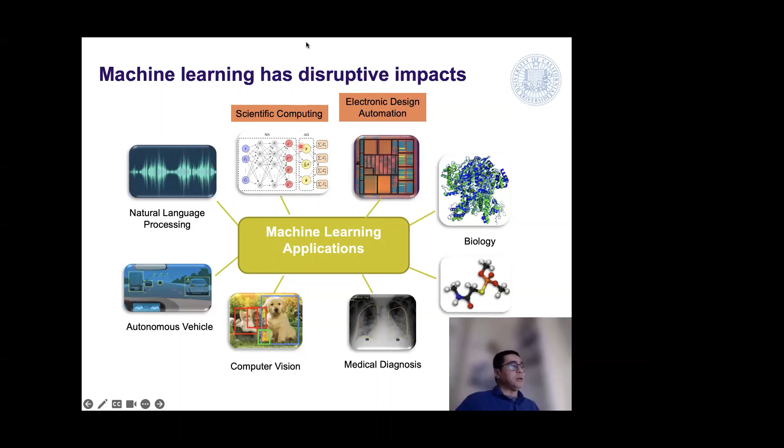As a result, many thermal power regulation techniques have been introduced in the past, such as clock gating, power gating, dynamic voltage and frequency scaling, and task migrations. But one critical foundation for all these regulation algorithms is to correctly estimate the chip temperature so that they can make the right decisions.

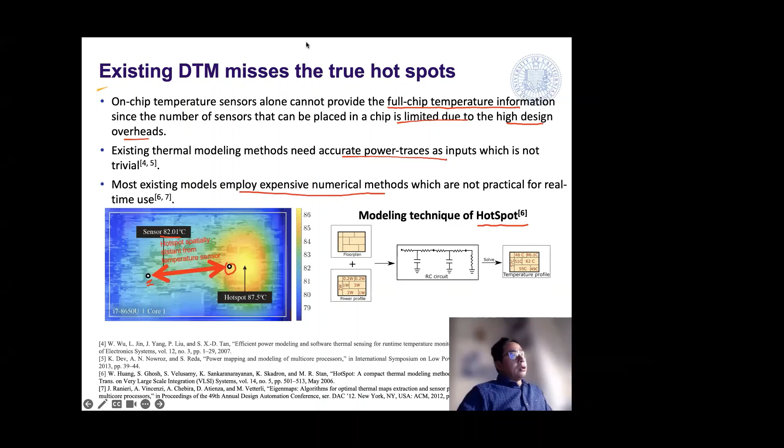But as we know, this is typically for design time - they are not very efficient for on-chip real-time estimations. Although there are many existing numerical approaches, all of them are quite expensive, not practical for real-time estimation.

The first focuses on thermal hotspot and full chip thermal map estimation using machine learning based approaches. The second is full chip power density estimation, also for commercial multi-core chips. The third, we focus on using convolutional graph neural networks for fast thermal analysis for chiplet based designs.

And then I'm going to introduce the thermal IR camera setup system used in my lab to facilitate some of the research work here. Then I'm going to cover the following specific topics.

First, I'm going to show you how to do hotspot heat source identification. And then I will talk about how we do full chip thermal map estimation based on what we call a high-level utilization metrics using machine learning based approaches.

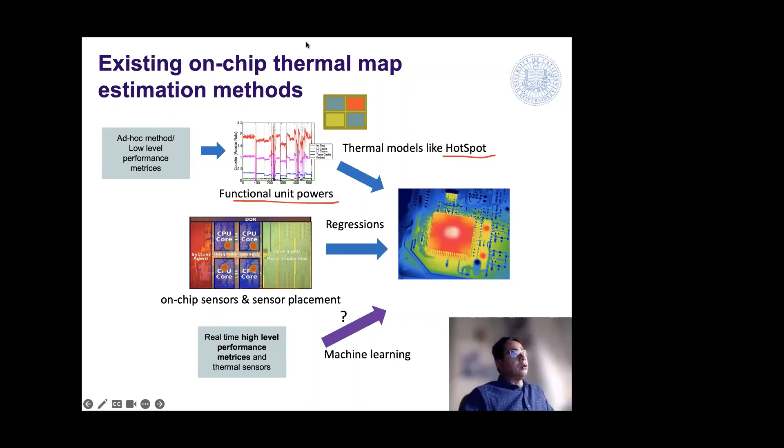So it turns out there has been a number of research efforts performed in the past to do full chip thermal estimation. We can classify existing methods into several categories. The first category is called a bottom-up approach - basically, as the name suggests, they try to build a thermal model from existing numerical approaches, for example finite difference. This is actually represented by HotSpot-based approaches. Then there's also a lot of research to develop so-called equivalent thermal RC networks.

This kind of approach typically requires more expensive computation because the network tends to be very large for very accurate thermal analysis.

The second one is what we call top-down based behavior thermal models. My lab actually developed several of this approach. Basically, we try to build some system models using pole-zero methods to capture the thermal response using the matrix pencil subspace identification method.

Regarding power estimation, there's also a number of approaches developed to estimate the function unit power based on some low-level performance counts. For example, this paper from our lab. Then there's some other approach that's more ad hoc. So in general, estimating the function unit power is not trivial.

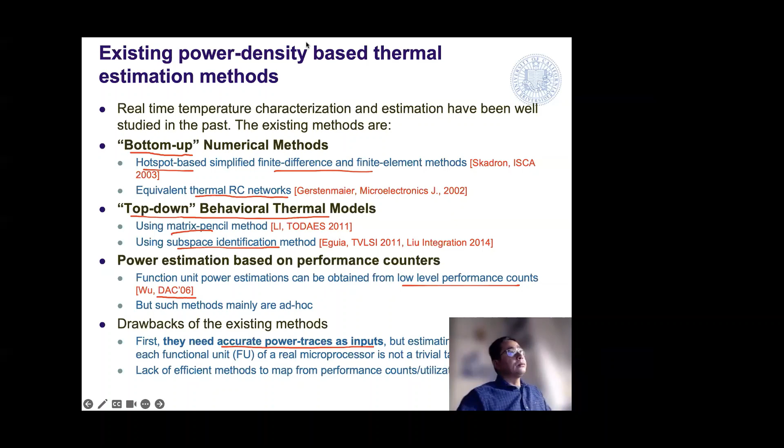One of the key differences between our approach and the existing approach is that instead of using the function unit power, we use high-level performance metrics.

And also we can access them in real-time fashion, so it's very fast.

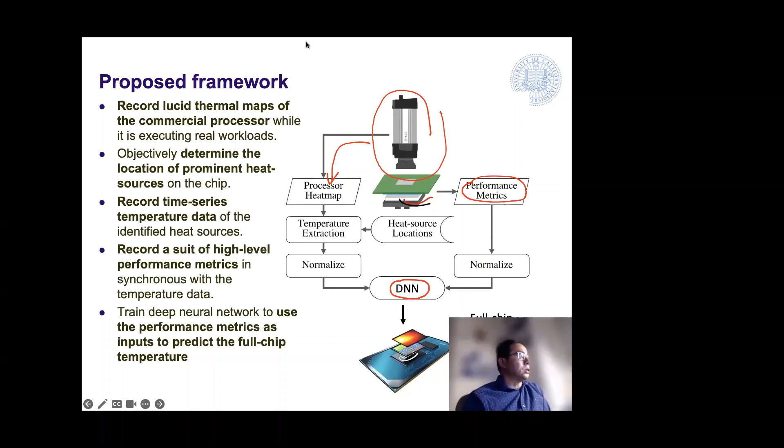Using this thermal camera, we can record two kinds of data. One is the thermal map information, you know, from here. And then at the same time, we can synchronously record all the performance metrics like IPCM, as I mentioned. Once we get all this data, we can use machine learning to train the data using the performance metrics as the input, and the measured data from the thermal cameras as the output, to train the networks. So basically, this is the flow of the proposed method.

To measure the on-chip temperature information, the thermal map, turns out to be a challenging problem. The reason is that to really measure the temperature map, we have to remove the heat sink. Typically, if you remove the heat sink, the chip can burn out very quickly.

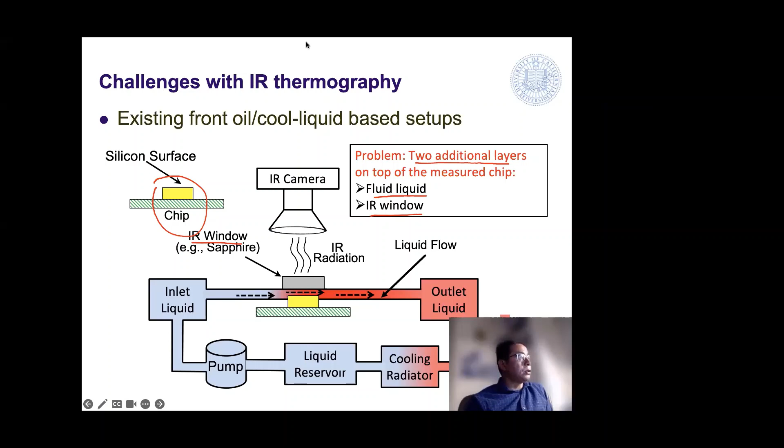So in this work, we use a totally different thermal imaging system. Instead of cooling the chip on the surface, we actually cool the chip from the back.

So the first question we have is that instead of finding the temperature hotspot, actually we find the so-called heat source, the power density hotspot. So why a power density hotspot? The reason is that the heat source hotspot actually is a potential temperature hotspot. Because in our work, we need to try to find all the potential temperature hotspots. As a result, it is better to find the power density hotspot. We're going to explain this more later.

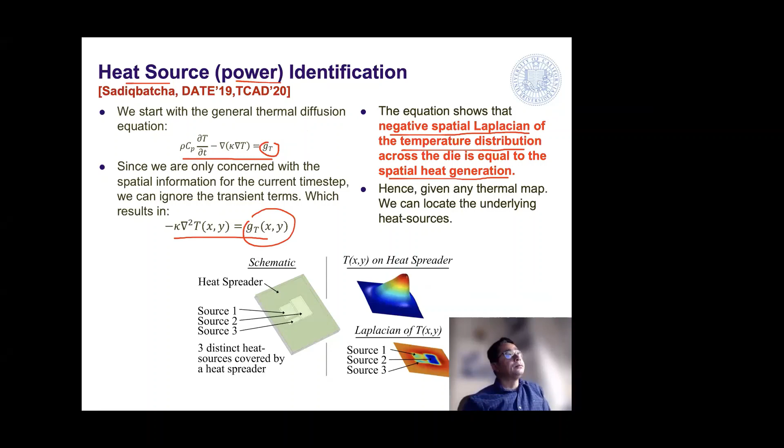So this figure gives you some visualization of how the heat source hotspot is computed. Let's say we start with this temperature map on the left-hand side. You can see the hotspot is pretty smooth in these regions. And then after the 2D Laplacian transformation, we get these figures right here. You can see we have a lot of heat source hotspots. But this just depends on the specific workload. To find all the potential heat source hotspots, we have to run many benchmarks, maybe thousands of them, to get a complete list of the heat source hotspots.

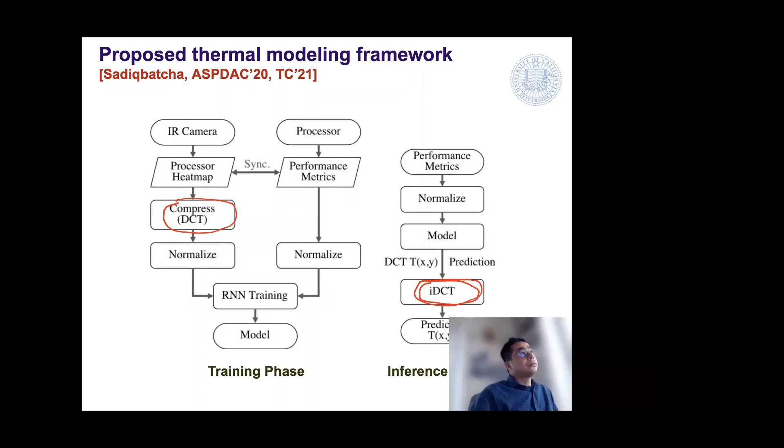So the next question we need to answer is how many coefficients we need for the image compression. We did some studies. We used 140,000 heatmap images for training, and computed the root mean square error of the image compression versus the number of DCT coefficients.

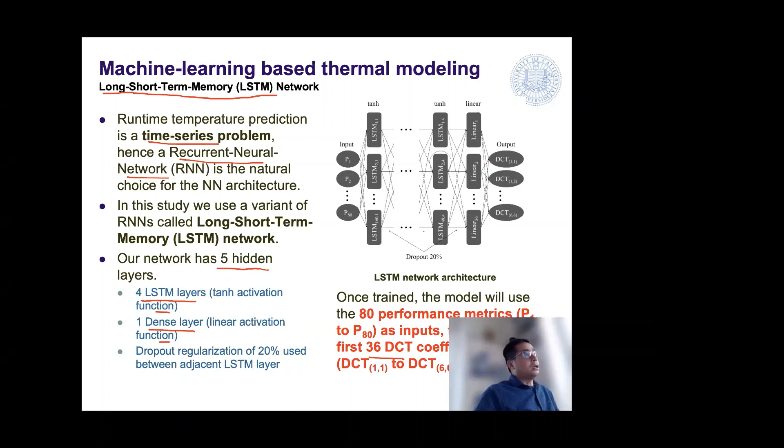For the LSTM, we basically have 100 epochs for training with 60 time steps. For all the data, 64% is used for training, 16% for validation, and the remaining 20% for testing. We make sure that the testing data doesn't have any overlap with the training data, so that we can really estimate the errors.

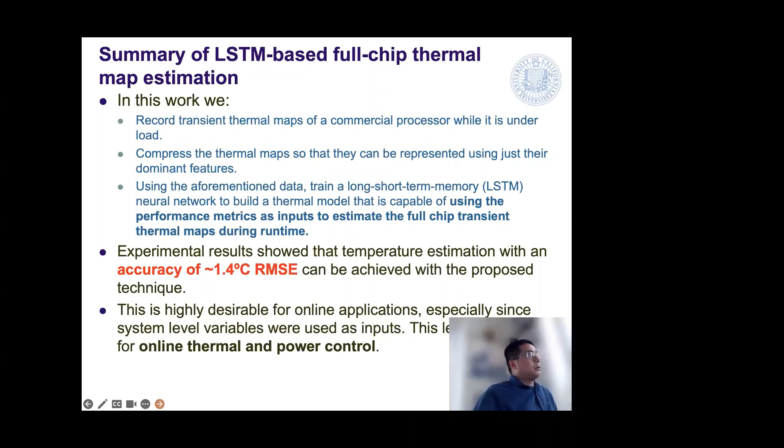This slide just summarizes what we did for the full-chip thermal map estimation. First, as we know, we have this thermal IR camera setup. As we know, generative neural nets have become very popular for image generation. Among all these generative networks, the generative adversarial network, also called GAN, is the most popular one.

The GAN model basically consists of two components. The first one is called the generator, and the second one is called the discriminator. The generator and the discriminator compete with each other. The generator generates a so-called fake image, which is fed into the discriminator, and the real image is also fed into the discriminator. The discriminator tries to distinguish between the real image and the fake image. It outputs real or fake.

The output constructs the loss functions, which feed back to the generator and the discriminator during training to improve both networks. So basically, after training, we hope the discriminator cannot distinguish the fake image versus the real image, so that the net result is that the generator will generate a very realistic image, which is like the real image.

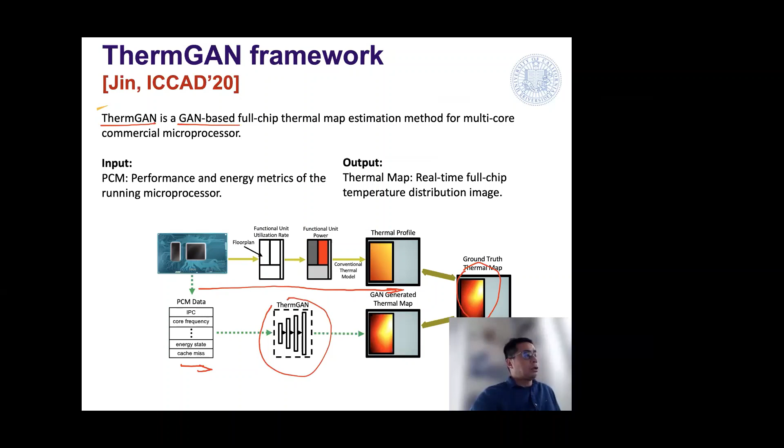This slide basically gives us more detail. Here's the ThermGAN architecture. ThermGAN is a GAN model. Basically, it consists of generators. The input of the generator is the PCM data, which is fed into the generator. It first forms the fully connected layers, and then it upsamples to generate the fake image. Then either the real image or the fake image will feed into the discriminator. The discriminator actually is a normal convolutional neural network.

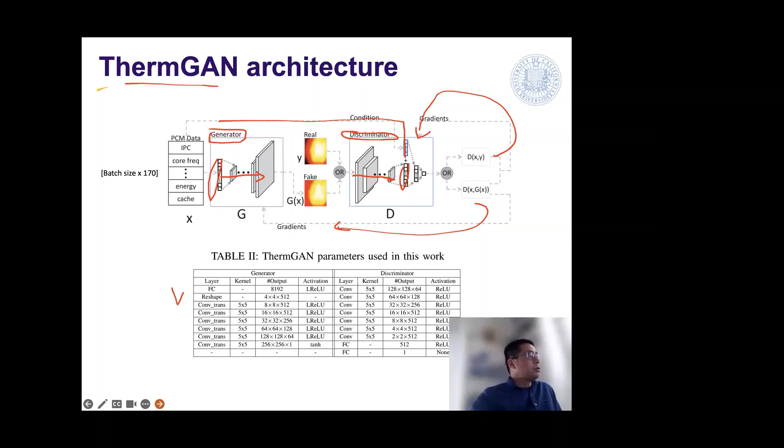It will first take the image, and then it will downsample into the latent features and create the fully connected layers, and then the PCM data is also concatenated with these fully connected layers here, eventually to form the two fully connected layers. The output will be just one value indicating if the image is real or fake. Also, the loss function will be formed to train both the generators through this feedback loop, and then the discriminators. Here are just some hyperparameters used for our ThermGAN models.

So this graph gives a further illustration of both the generator and the discriminator used for our ThermGAN modeling. So basically, the PCM data will form a fully connected layer, which includes 170 cells, and then it will generate another fully connected layer. This fully connected layer will be reshaped into the tensors. Through this upsampling process, we're going to create the thermal maps. This actually is a fake image.

Then the discriminator basically takes as input a thermal image, which can be a real thermal map or the fake thermal image, and then it will downsample to generate the latent features and form the fully connected layers, which are concatenated with the PCM data to form another two fully connected layers. So this discriminator will eventually judge if the input is fake or real.

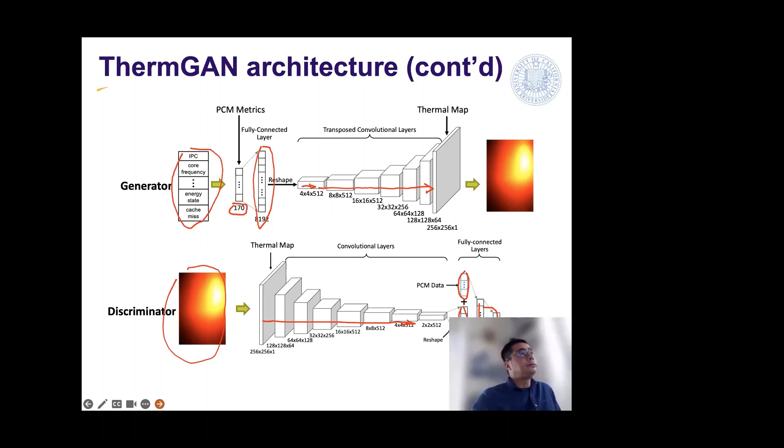Regarding the time, we found that the average cost for the inference is about 7 milliseconds. That translates to about 140 thermal maps per second. That's actually sufficient for online thermal and power regulation.

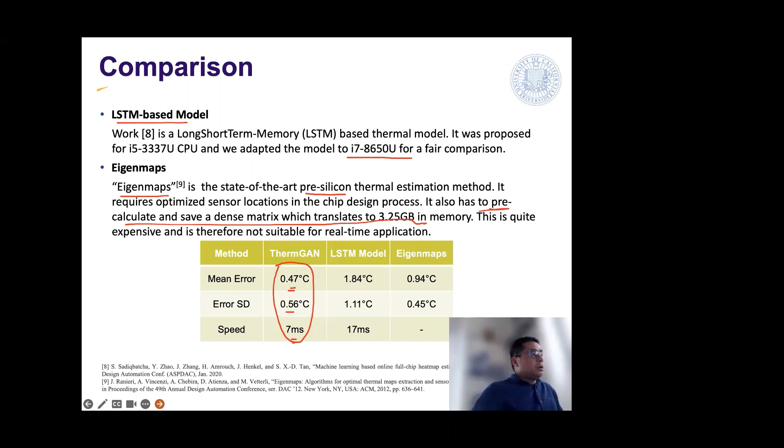As a result, these methods are actually not a real apple-to-apple comparison, but we just compare the accuracy between these three methods. This table shows that in terms of accuracy, ThermGAN beats both methods in terms of mean error and standard deviation. Also, in terms of inference speed, the ThermGAN model is faster than the LSTM method.

So this graph further shows the real-time capability of ThermGAN. We run ThermGAN on a brand new workload, which it has never seen. Basically, we run ThermGAN on the CPU for 2 minutes and then collect 7,200 samples. We found that ThermGAN actually yields an average root mean square error of 0.83 degrees with a standard deviation of 0.52 degrees. This is very accurate, consistent with our previous observations.

Then this cartoon illustration shows the estimated thermal map in real time and the ground truth. As you can see, they match very well, almost in real time. To further illustrate the accuracy, we collect the thermal information at one particular location on the chip and then plot this thermal information over time. The blue lines are ground truth, and the dotted line is the estimate. They match very well, pretty much over the whole time period.

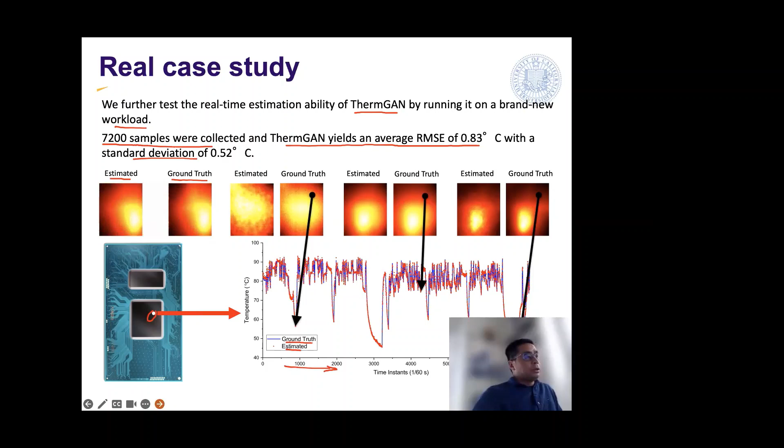Now let's switch to the third topic. Here, the problem is how to estimate full-chip power density maps given the thermal maps, supposing we have a measurement of the thermal maps. Let's go quick. Here I'm going to show the specific problem we try to solve. Suppose we have these thermal maps from measurement or some computation software. The goal is to estimate the full-chip power densities. This is kind of the reverse problem of power to thermal. Here we go from thermal to power.

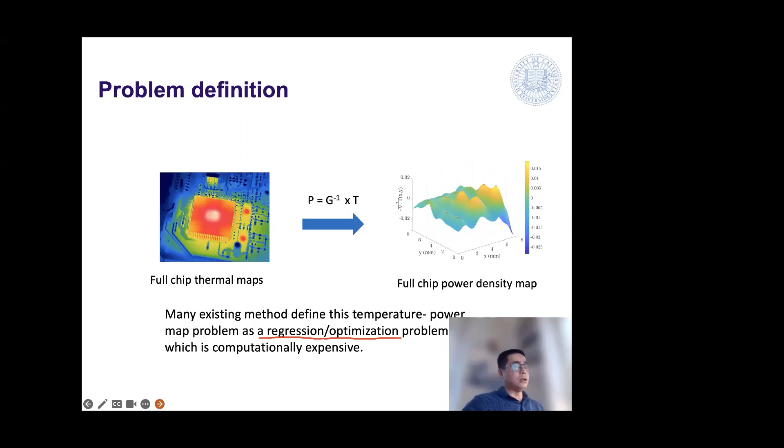There are many existing approaches from the past, and many of them are defined as regression and optimization problems, which tend to be very expensive. Also, as I mentioned, some combine sensor placement with the power density estimation problem, but they are no longer post-silicon based approaches. Okay.

Now let's look at how we find these 2D power density maps. We start with the thermal equation in 3D form. Because here we talk about steady-state temperatures, we can remove the transient terms. As a result, we end up with this equation. It basically says that the power density, and we only focus on the XY surface, equals the negative 2D Laplacian of temperature times kappa, which is the thermal coefficient.

This sounds very simple, but it turns out it is not, because there are two issues. First is how to estimate kappa, because the power density you get here is a scaled power density, not the real one. Second, we observe that in addition to positive power density, there's negative power density. This is true across all the thermal maps we obtained. As a result, we have to figure out how to use this so-called raw power density map to estimate the real power density maps. This is the problem we try to solve.

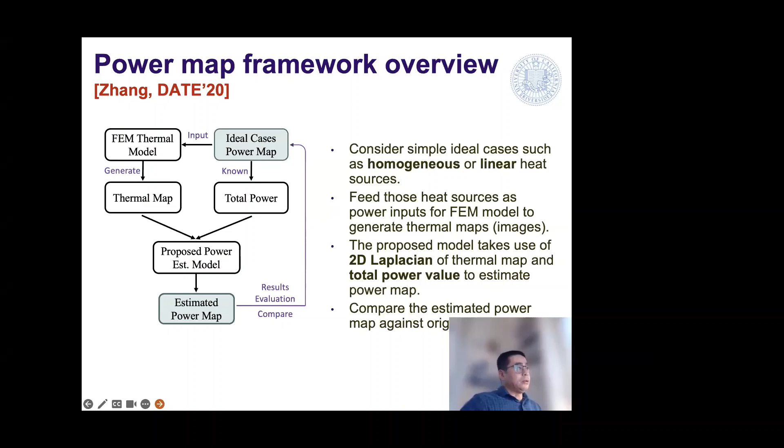Here is the framework guiding our research on how to estimate real power densities. We start with some ideal case, which I'll talk about a little later, where we know exactly what the power density will be. We run it through the thermal models to get the thermal maps, and of course we know the total power. After that, we use our proposed method to estimate the power densities from these thermal maps, then compare with the ideal power case to see if they agree. If they agree, then we know how to compute the real power density maps from measured thermal maps. So this is the workflow.

Here we actually have two cases. The first is a very simple case where you have a uniform, homogeneous heat source in these squares, on a board set up in this kind of environment. The heat flows downward in these directions. Then, based on thermal models of these structures, using COMSOL, we can compute the 2D thermal maps. After we get these thermal maps, we apply the 2D Laplacian and get this power density map.

From this power density map, we can indeed see there's a positive part right here, the yellow colors, and then there are negative power densities, the green and blue parts. As we know, the real power is in this region, not in the blue regions. Those just represent power dissipation, while power generation is zero in these areas.

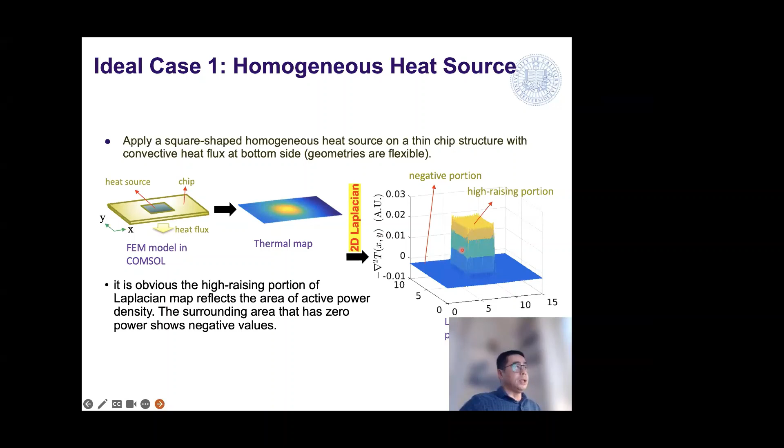So we found that if you integrate the power density across the whole chip, every pixel, the positive portion and the negative portion add up to zero. This is not a surprise, because we're talking about steady state: the net power density must be zero. So that confirms our observation that you have power generation and power dissipation, and they cancel each other out.

Here are some of the formulas we have. Basically, we say that this 3D volumic power density can be equal to this Pxy, which defines the surface power densities. And then this Pd represents the dissipation power density, but they are also surface. And this is the chip thickness, delta Z. So this volumic power density will equal these two surface density differences divided by delta Z.

Okay. And then we can replace this power density by the thermal equations right here. If we do this integration across the whole chip, we end up with these formulas. As we know, eventually this integration will lead to zero. That means that P equals PD, right? P equals PD. Okay.

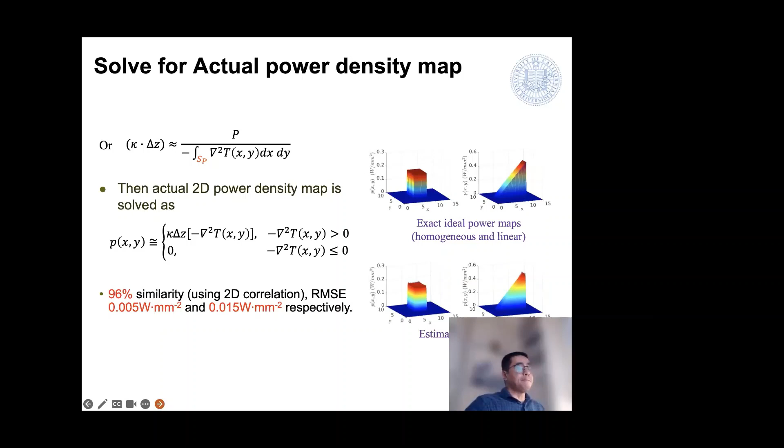Here we go further. Based on the estimated thermal power, we use COMSOL to build the FEM finite element thermal models. We try to use this thermal model to map the estimated thermal power back to temperature again, and then compare that temperature against the measured temperatures, because this is the ultimate comparison for our proposed approach. Of course, we try to mimic the real chip setup based on the information we have. And we also measure the CPU idle status, so that we know the boundary conditions.

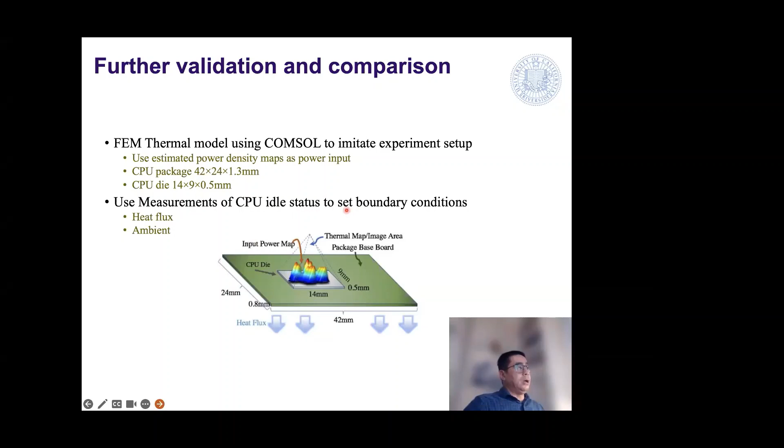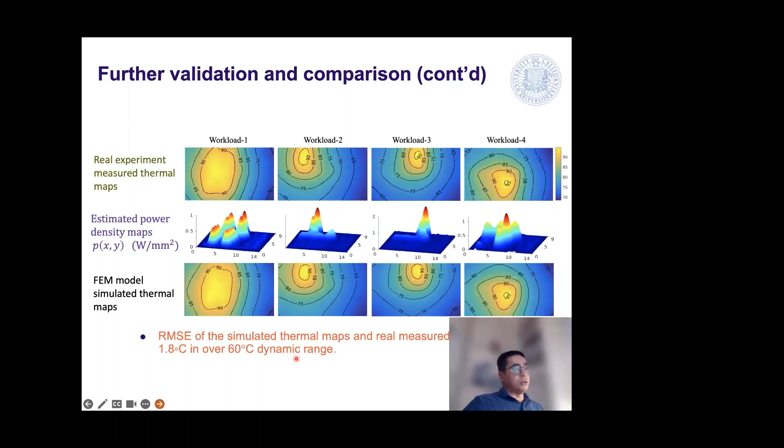We found that the largest root mean square error is 1.8 degrees, over this 60 degree dynamic range. We consider this very accurate already.

Here's the last topic I'm going to present today: how we're going to perform fast thermal analysis for chiplet-based designs.

As we know, chiplet-based design has become very popular recently because it provides many benefits compared to existing single die-based designs. For chiplet-based design, one of the major concerns is that because you have to integrate many chiplets together, the thermal aspect of the chip design is a major concern. For instance, during the placement of different chiplets, we have to estimate the thermal impact. So fast estimation of thermal impact for different floor plans of chiplet placement and floor planning becomes a very important topic.

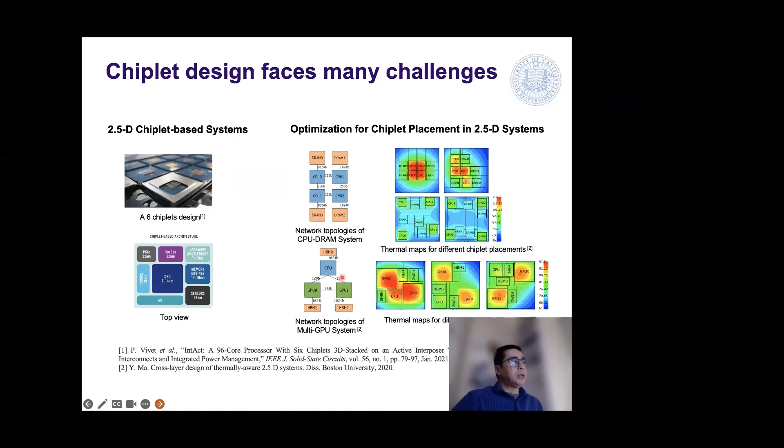Today we're going to show how we can perform such fast thermal analysis.

There are many approaches that have been proposed for this. How do we generate a model which has more transferable analogies and can deal with different problem sizes? Basically, there are two approaches to deal with this problem.

One idea is using this tile-based method. Basically, they partition the whole chip into different tiles, then perform machine learning on each of these tiles, and after that put all these tiles together to build the final solution. Because we just focus on local tiles, we can deal with different problems because the problem may be globally different, but locally they may be the same. That's basically the assumption of this tile-based approach.

The second approach uses so-called graph convolution networks, because graph neural networks by nature can deal with different problems, since the input of this graph neural network is a graph, and a graph can be different graphs, meaning different problems. So naturally, they can deal with different problems, even when they are trained only on limited data.

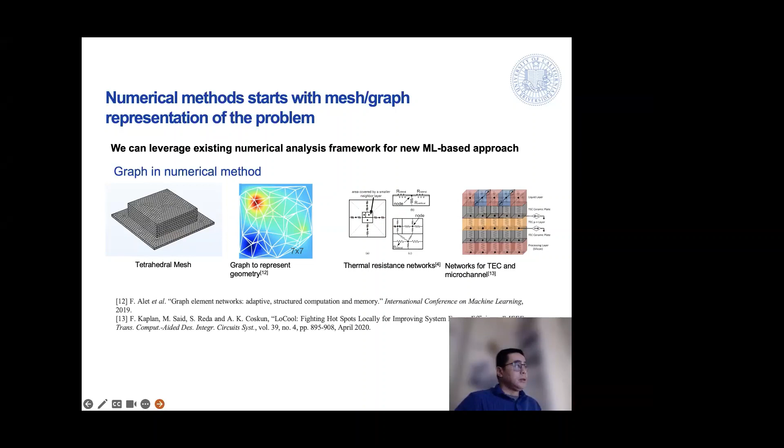Specifically, let's say we have this set of resistor networks, which is converted using HotSpot. After that, we define this graph. The graph is an undirected graph with nodes and edges. The nodes embed some features, for example power and temperature, and the edges embed information like resistors—in this case, sets of resistors. As a result, we end up with this kind of graph.

Here, I'll talk about several existing techniques proposed for graph convolution networks. The basic idea of the graph convolution network is that we try to compute the graph information for each node based on its neighborhood information. This is called the convolution operation. There are many methods to perform this convolution operation.

The first idea we borrow is so-called graph attention networks. The idea is that we use an attention coefficient to consider the connection effect—here essentially a set of resistor effects.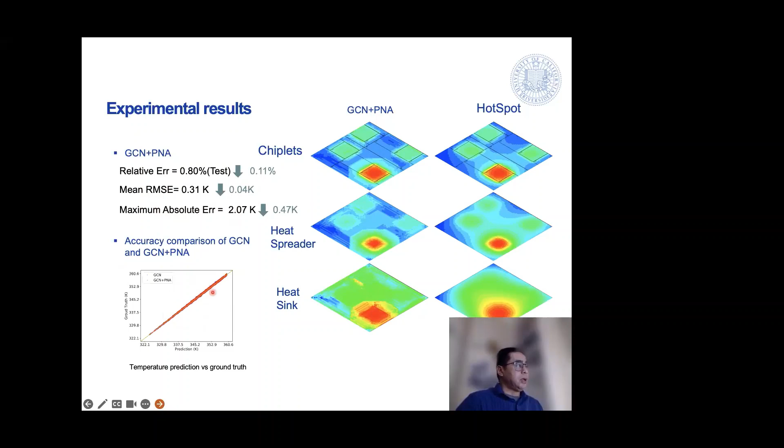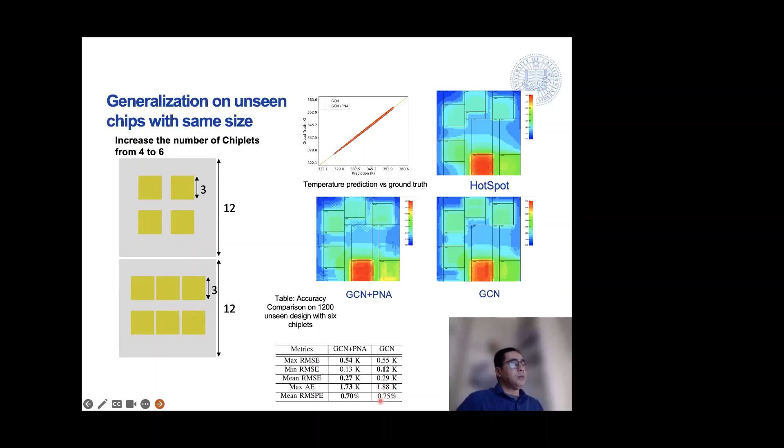Here, we also distinguish two cases, the GCN with the aggregation operation and without aggregation. So we can see that in general, with aggregation, it always leads to less error compared to without aggregation.